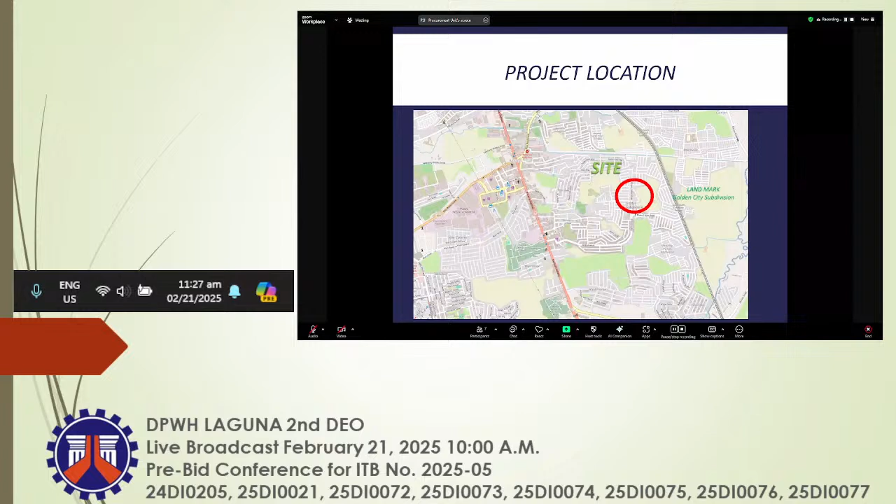Ang scope of work is construction of two-story covered court with common toilet and conference room on the ground floor, and a basketball court on the second floor. Project location is near Golden City Subdivision, Barangay Dila. So ito po yung bilog, doon po sa site is yung sa red po, yun po yung site po.

Then ang site development po, floor plan po natin. So may kanal po siya, tabi po siya ng kanal. Then ito po yung structure po natin. So may common toilet tayo sa pambabae at panglalaki. Then meron din tayong pantry. Then toilet for PWD and pantry for the toilet for the employees po. Then meron tayong conference room. Yan po.

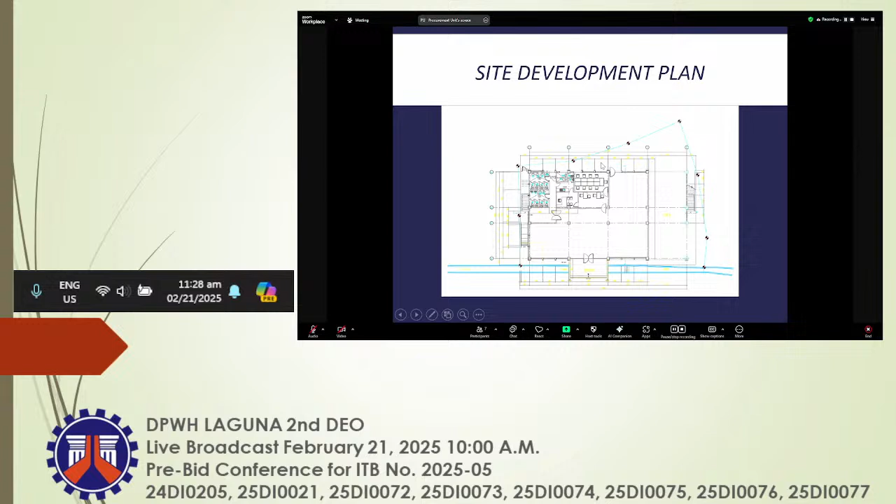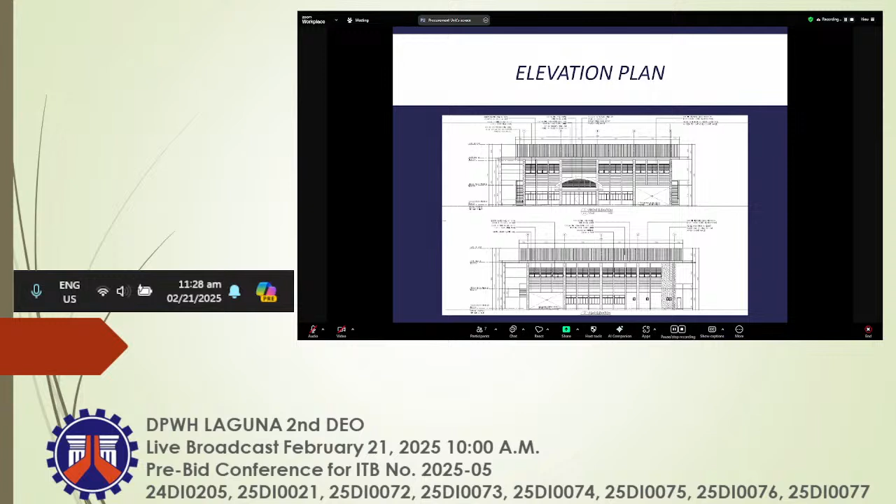Then ito po yung second floor plan, so mostly court po siya ng basketball. So with regards to elevation, ito po yung elevation po natin. So ito po yung site photos natin. Ayan po yung court. Then may i-remove din tayong stage, then mga puno po. Yan po.

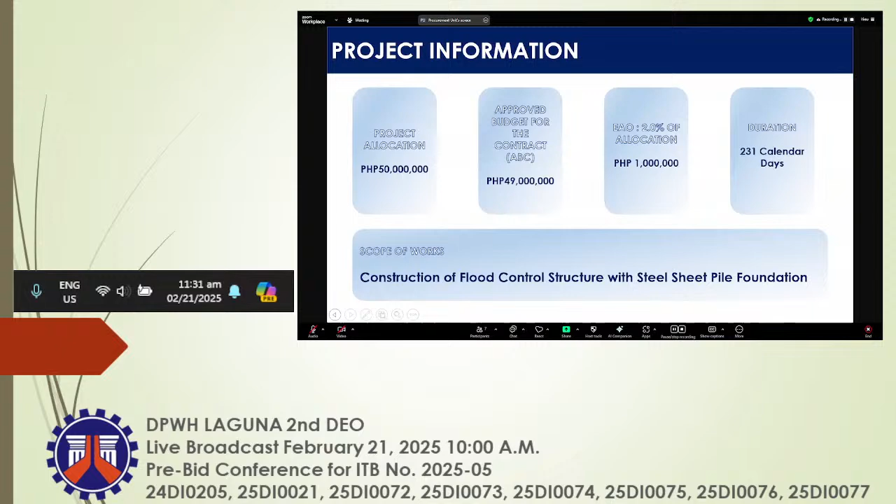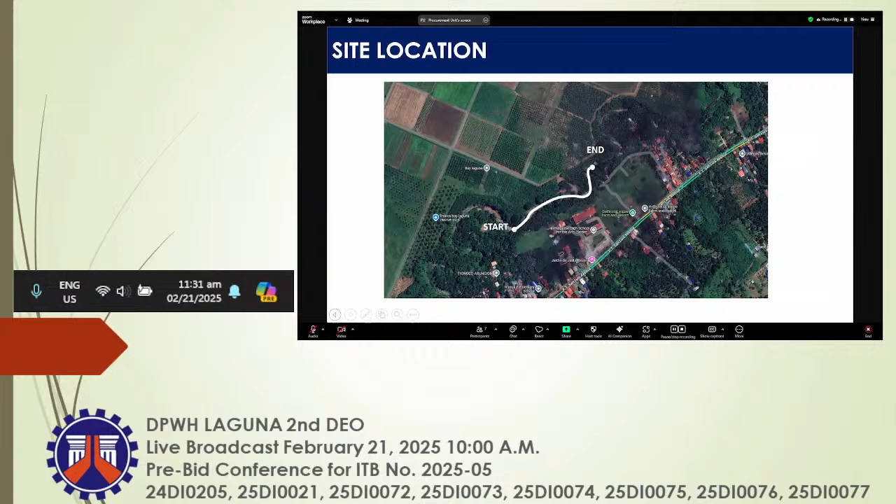For our scope of works, construction of flood control structure with steel sheet pile foundation. Ito po yung ating site location. So, ang starting point po natin is from upstream going downstream po tayo. Ito po ang ating site validation photos. Then, ang typical plan po natin. Program of works po. Included po dito yung minimum equipment po natin: backhoe, dump truck, vibro hammer, welding machine, 1 bagger mixer, water pump truck, and then payloader.

For summary of quantities, Part A, facilities for the engineer. Part B, other general requirements. Then Division 1 General, Part D, reinforced concrete. Structural concrete Class A of 3,000 PSI for 28 days, lean concrete, and then reinforcing steel, deformed grade 40. For our Division 4, flood control drainage and water supply. Part L, flood and river control drainage. Part LA, earthworks. And then Part LB, bank and slope protection works. For the sheet pile, steel slope protection.

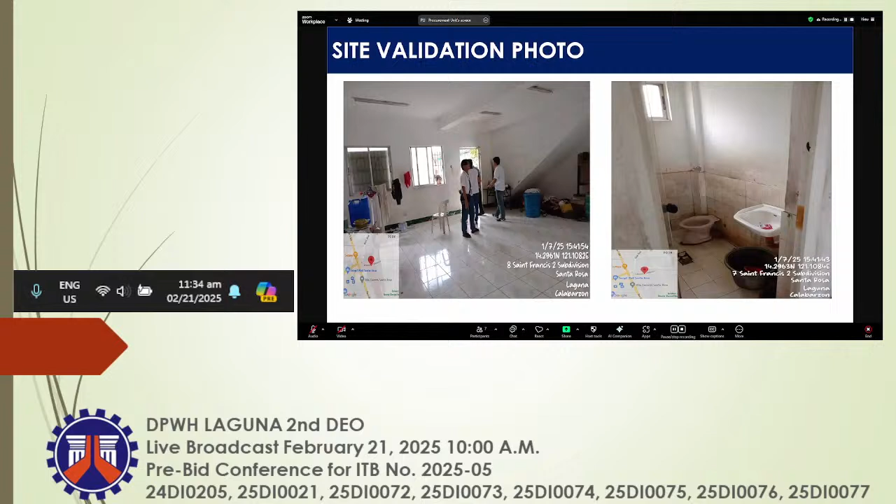Wait a minute. Para po sa summary of quantities, meron po tayong facilities for the engineer, other general requirements. Nakapaloob po dito yung ramp para po sa PWD. Earthwork, reinforced concrete, finishing, electrical and mechanical. So, bali, ang pinaka-scope po natin is magpapalit ng tiles, repainting, doors, windows, ceiling, roofing, ramp. Bago din po yung ating electrical at saka plumbing. And may additional CR po sa second floor. Tapos meron po tayong parking. Makikita naman po natin mamaya sa plano yung parking.

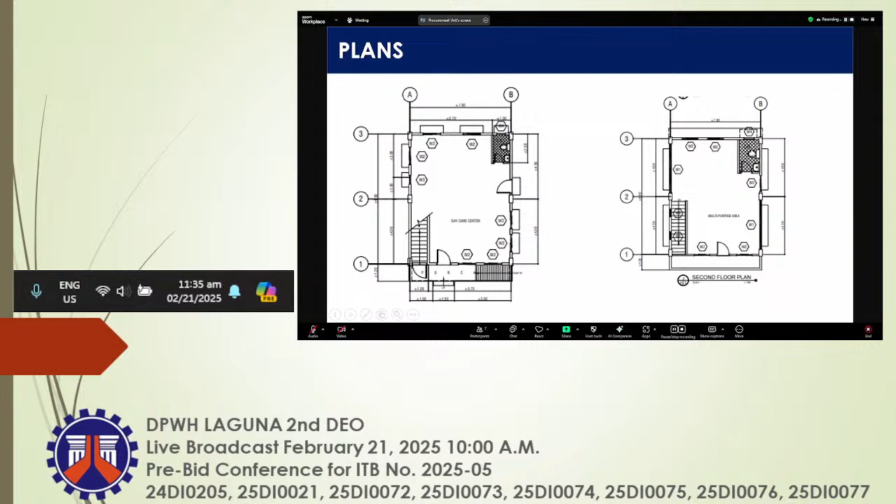So ito po yung ating ground floor and second floor plan. Ito po yung additional CR. Ito po yung ating elevation. Front and left side, right and rear. Kasi ito po yung ating plan para po sa parking.

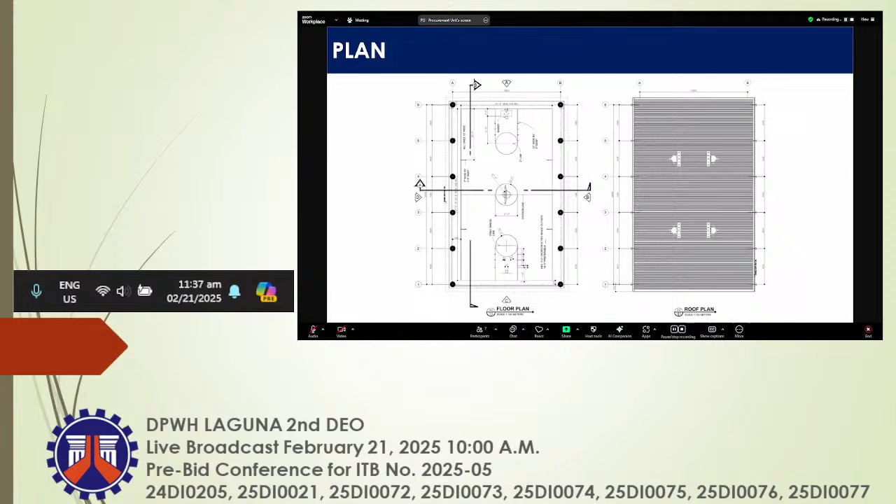Then for the pay items po, nandiyan po yung ating facilities for the engineer. Nandiyan po yung construction of field office. Fixtures, then photographs, then yung ating other general requirements, then earthwork, reinforced concrete, finishing and other civil works, then electrical. Lahat naman po yan is yung ating typical po for covered court. So for the minimum equipment requirement po, 1 plate compactor, 1 backhoe, 1 bagger mixer, 1 pump crete, 1 bar cutter, 1 bar bender, 1 cutting outfit, 1 welding machine, and 1 dump truck.

So the project po is fully coordinated naman po with the barangay po of Pacita 2.

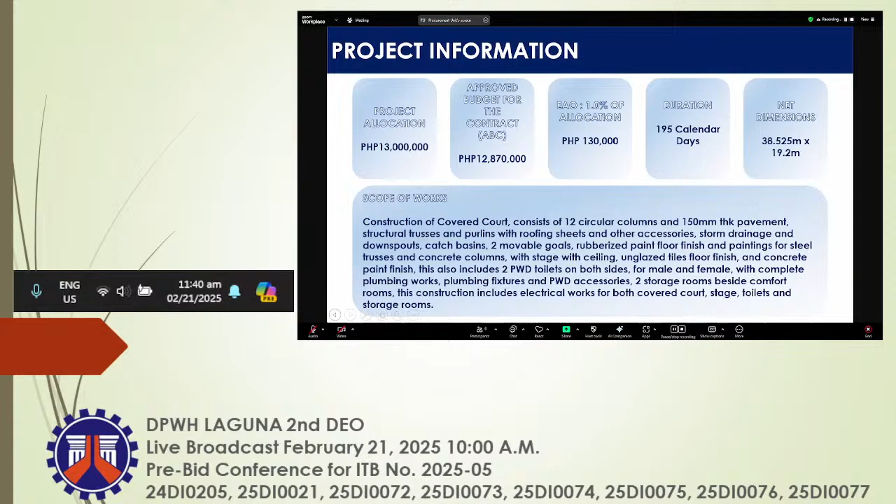This also includes 2 PWD toilets on both sides of stage for male and female, with complete plumbing works, plumbing fixtures and PWD accessories, 2 storage rooms beside comfort rooms. This construction includes electrical works for both covered court, stage, toilets, and storage rooms.

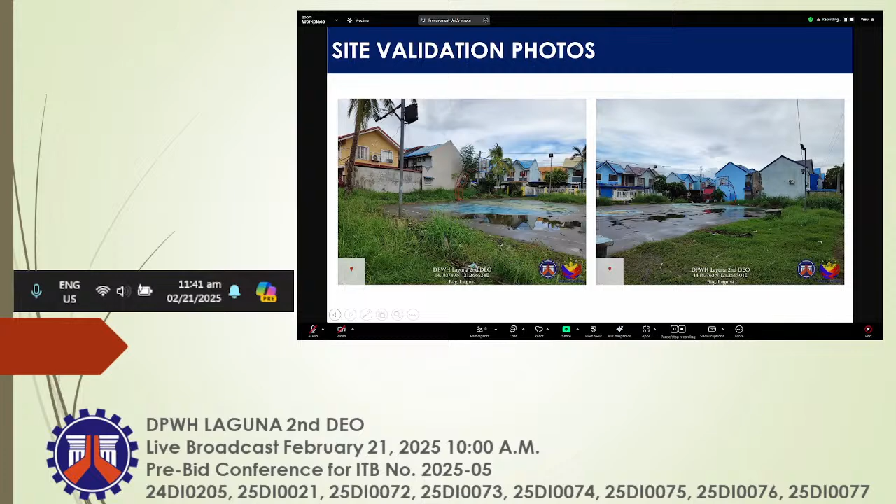For our program of works, for the minimum equipment, plate compactor, backhoe, 1 bagger mixer, bar cutter, bar bender, cutting outfit, welding machine, dump truck, and pump crete.

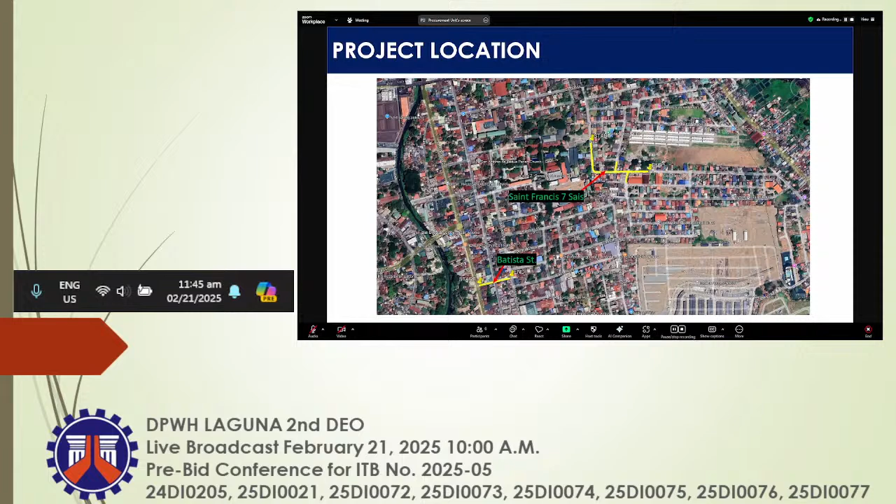And ito po yung project location, St. Francis 7 Sais po, and then Batista Street. And then the minutes of the meeting with coordination with Kapitan po, and signature by Kapitan din po.

Summary of quantities, we have the Part A, facilities for the engineers, construction of field office for the engineers, provision of furnitures, fixtures, equipment, and appliances for the field office for the engineer, provision of progress photographs. Part B, other general requirements, project billboard, signboard, occupational safety and health, traffic management, mobilization and demobilization.

And we have Part C, earthwork, removal of structure and obstruction, removal of actual structures obstruction, 150mm thick PCCP, surplus common excavation, structure excavation, sub-grade preparation, and Part D, sub-base and base course, aggregate sub-base course, Part E, surface courses, PCCP 230mm thick 14 days, and Part F, bridge construction, reinforcing steel grade 40 and 60, structural concrete 20.68 MPa class A 14 days, and lean concrete class B 16.5 MPa.

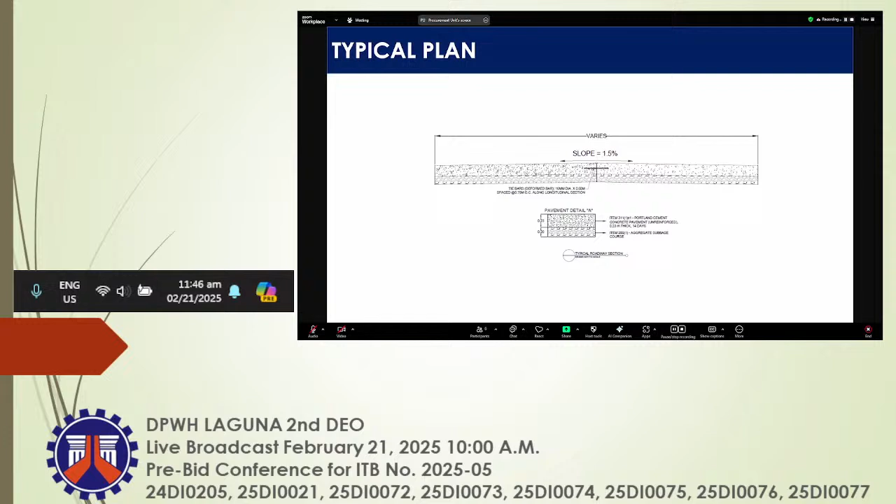Part G, drainage and slope protection structures, metal frames and gratings types. And last is Part H, miscellaneous structures, curb and gutter precast. And then ito po yung typical plan for our construction of road. So, gagamitin ko ay 230mm thick na 14 days po.

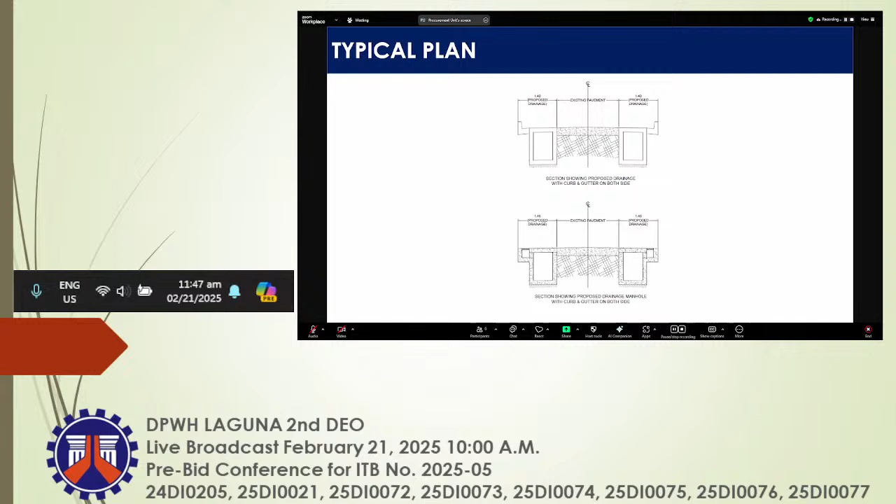And then, ito naman po yung typical plan for the drainage part po ng ating project. So, we have the curb and gutter po na may drainage po. And then, the minimum equipment po, we have the backhoe with breaker, 0.80 cubic meter, dump truck, 12 cubic yard, motorized road grader, 140 horsepower, vibratory roller, concrete vibrator, bar cutter, and joint sealer machine.

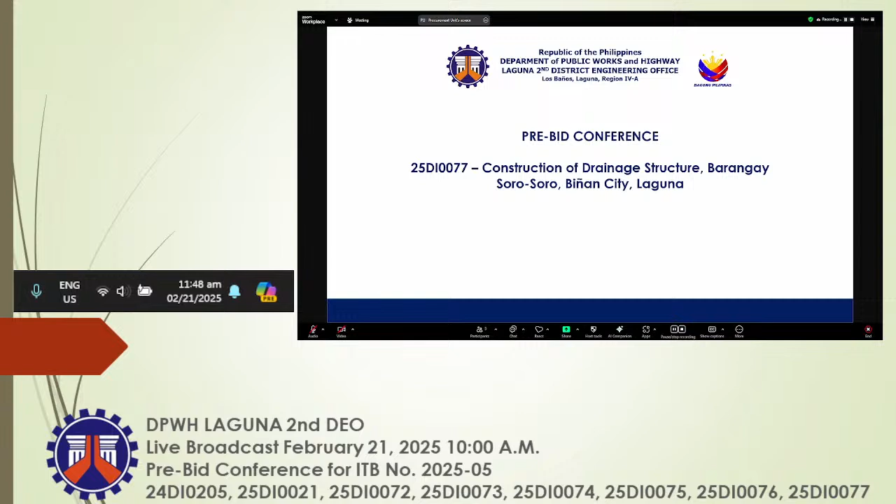Good morning po. For our last project with contract ID number 25DI0077, construction of drainage structure, Barangay Soro-Soro, Biñan City, Laguna. For the project information, project allocation of 40 million, ABC amount of 39,600,000, EAO is 1% of the allocation, equivalent to 400,000. Duration of 270 calendar days. Scope of work is construction of drainage.

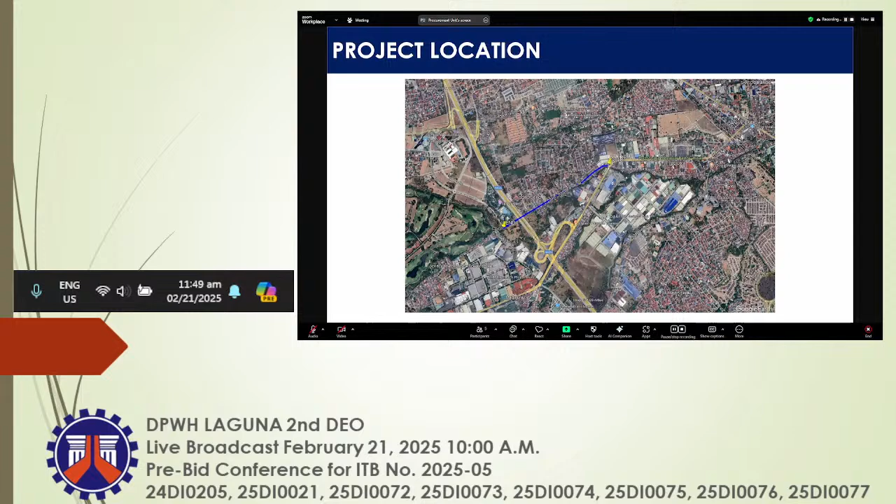Then for the summary of quantities, under facilities for the engineer, we have the construction of field office, provision of furnitures and fixtures for the field office, then provision of progress photographs. Then under other general requirements, we have project billboard, occupational safety and health program, traffic management, mobilization, demobilization. Under earthworks, we have the removal of structures and obstruction, and structure excavation common soil.

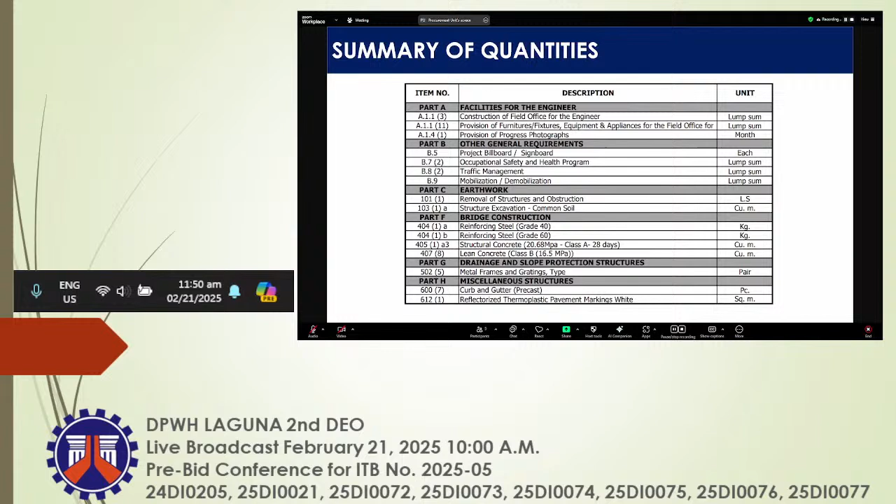Under bridge construction, we have reinforcing steel, grade 40 and grade 60, then structural concrete, 20.68 MPa Class A with 28 days curing, then lean concrete. Under drainage and slope protection structures, we have metal frames and gratings. Then under miscellaneous, we have curb and gutter precast and reflectorized thermoplastic pavement markings in white.

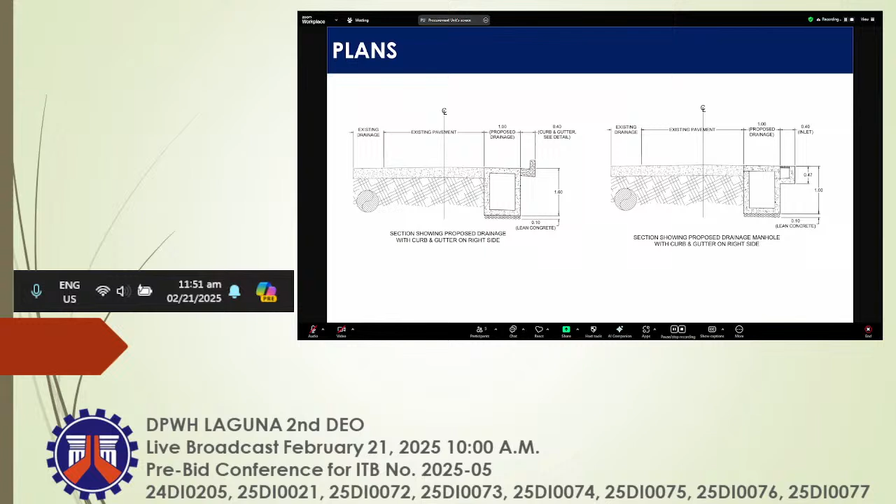Discuss ko lang po ang topic na to for those prospective bidders na gusto sumali sa bidding natin in the future. These are the major category of works and PCAB category. So kung kayo sasali, ang PCAB niyo po should be for the first project, 24 DI 0205. The ABC is 39,600,000. The following are the major category of works. So, buildings po siya. So, ayan po yung mga related sa inyo. Dapat may experience po kayo regarding dito. Ngayon, gusto nyo sumali, your PCAB license should have a license category of B and classification of medium A.

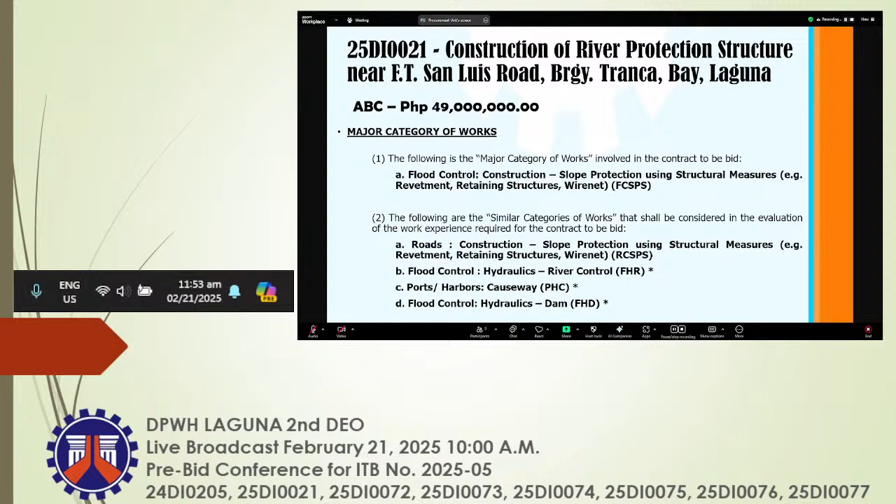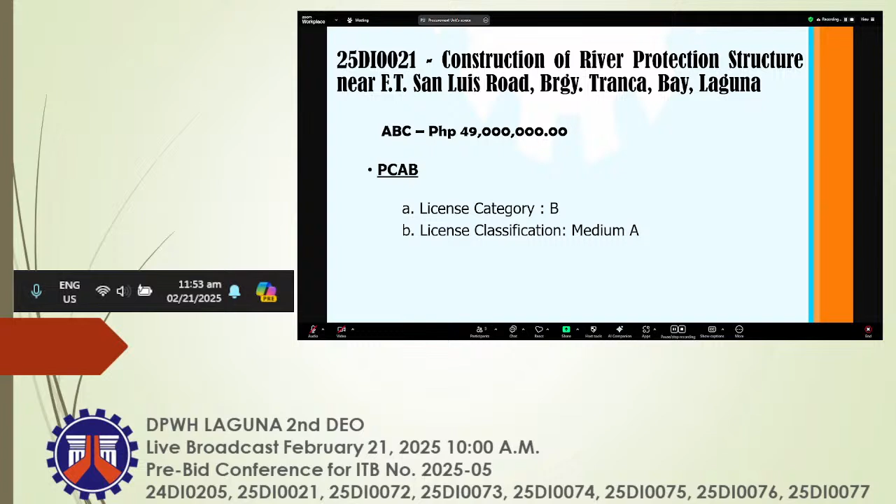For the second project, 25 DI 21. ABC is 49 million and the following are the category of works. Slope protections, flood controls with roads. If interested, PCAB license should have a license category of B and classification of medium A. Third project, 25 DI 072. ABC of 4,950,000. The following are the major category of works. Any of the following po, pwede po. So your PCAB license should have a category of C and D and classification of small B.

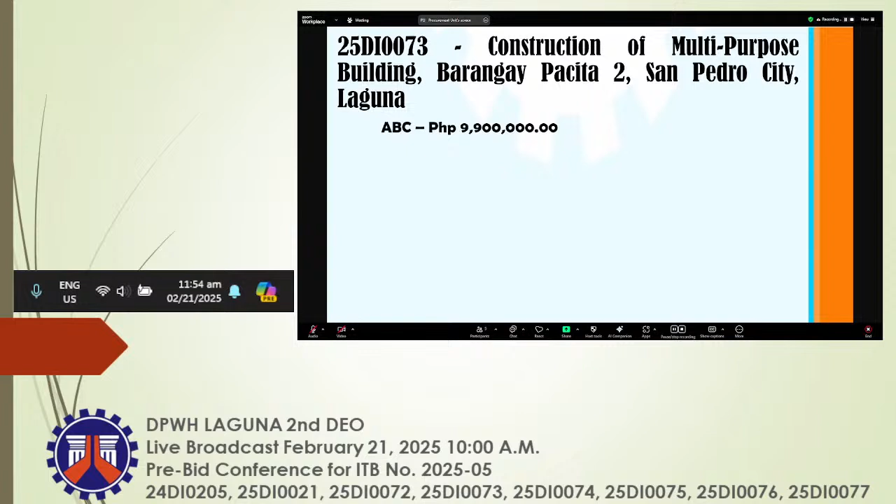Next project, 25 DI 73. 9.9 million ang ABC and the following are the category of works. All are buildings. Experience nyo dapat po ay building. And your PCAB license should have a category of C and D and classification of small B. Next project, 25 DI 074 at Santo Domingo, Balibago with an ABC of 12,870,000. The major category of works are the following. Buildings again. If interested, your license should have a category of C and D and classification of small B.

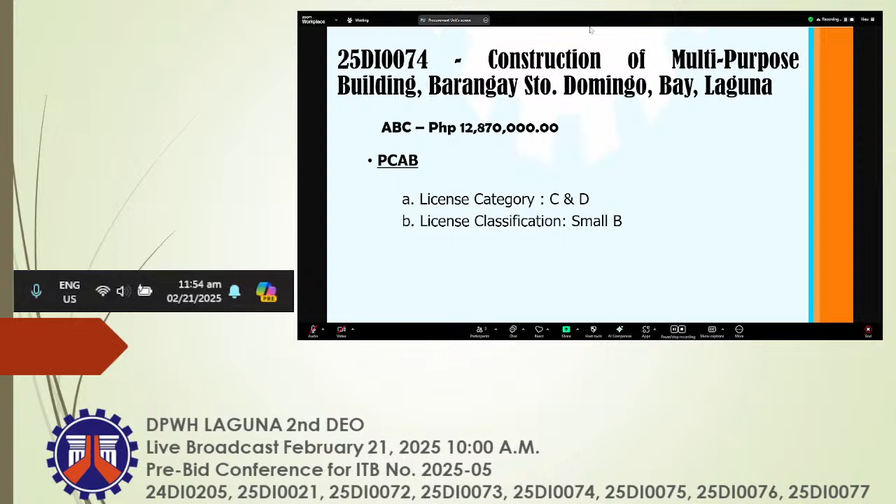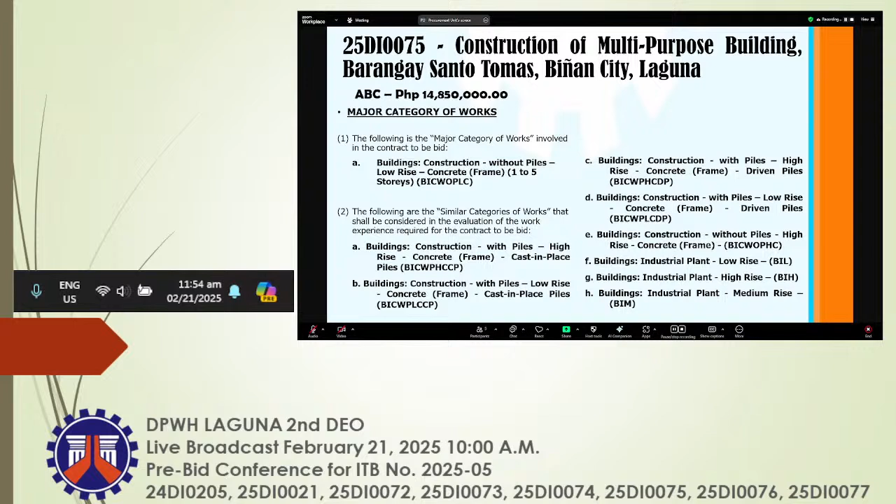Next project, 25 DI 0075 construction MPB, Santo Tomas, Biñan City. With an ABC of 14,850,000. The major category of works are buildings again. If interested, your PCAB license should have a category of C&D and classification of small B. Next project, 25 DI 0076, construction of road, Barangay San Antonio, Biñan City, Laguna, with an ABC of 14,850,000. The major category of works are roads, construction and rehab. If interested, PCAB license should have a category of C&D and classification of small B.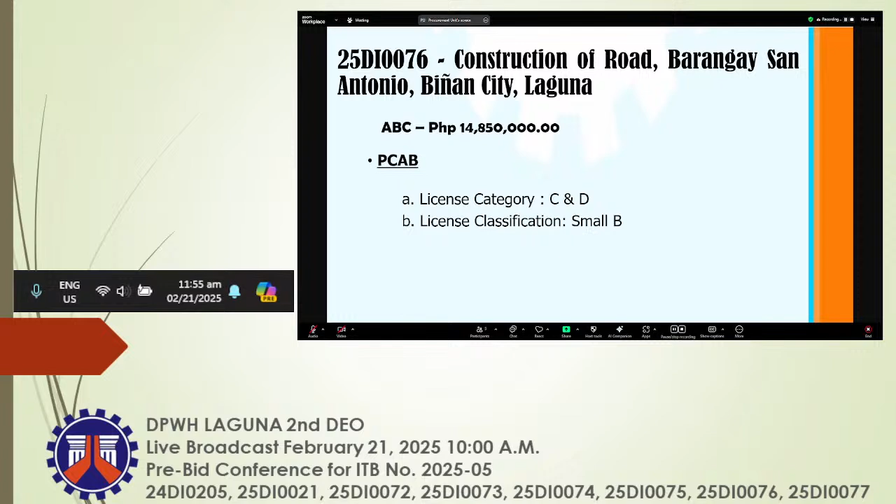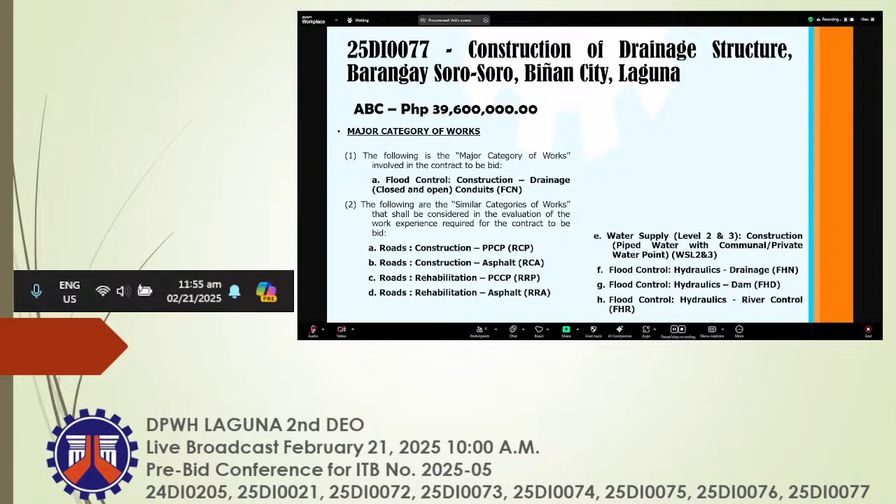Next project, 25DI0077, construction of drainage structure, Barangay Soro-Soro, with an ABC of 39,600,000. The major category of works are flood control constructions with roads, water supplies, hydraulics, and jetties. If interested, your PCAB license should have a category of B and classification of medium A. I believe yun na po yung last project. If there are any questions po, you may do so.

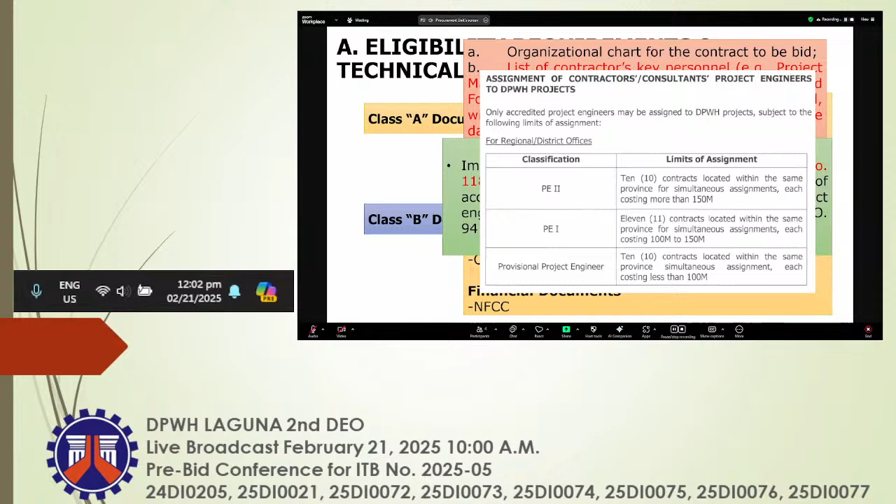For the original duly signed omnibus sworn statement or the OSS, and if applicable, original notarized secretary certificate in case of a corporation, partnership, or cooperative, or original special power of attorney of all members of the joint venture giving full power and authority to its officer to sign the OSS and do acts to represent the bidder.

So the net financial contracting capacity, or the NFCC, of the bidder shall be used in the eligibility processing. Prospective bidder must have an NFCC at least equal to the ABC to be procured as follows. The NFCC is equal to current assets minus current liabilities times 15,

minus the value of portions of all outstanding works under the bidder's ongoing contracts, including awarded contracts to be started, which portions coincide with the contract to be bid. In the NFCC, the fixed factor of 15 shall be used in computation of NFCC regardless of the contract duration.

For the Class B documents, the Special PCAB Joint Venture License and Valid Joint Venture Agreement. If applicable, duly signed joint venture agreement or JVA in accordance with RA number 4566 and its IRR in case the joint venture is already in existence, or duly notarized statements from all the potential joint venture partners stating that they will enter into and abide by the provisions of the JVA in the instance that the bid is successful.